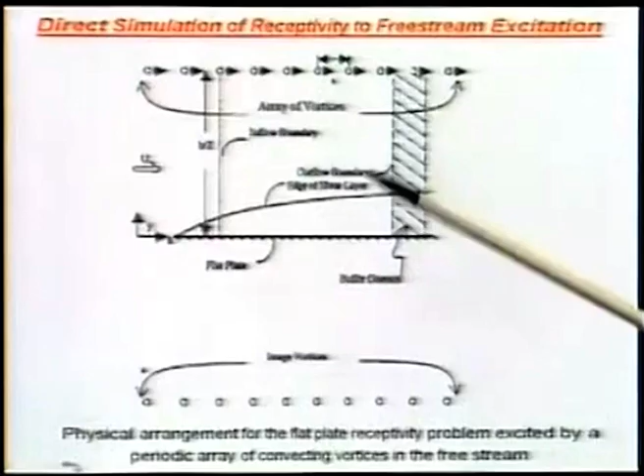The moment that we want to simulate the flow past a flat plate like this with, let's say, very uniform free stream approaching the plate, u infinity, then because this is a no-slip wall and we are putting some kind of singularities out there, these singularities will tend to create some induced velocity. For example, if I talk about a particular vortex here and look at a point like here, what will happen? This will create a velocity normal to that radial vector.

So what happens is that gives rise to a wall normal component and a slip component. The slip component does not create too much of a problem, because it is going to give existing fluid particles some kind of slip velocity. However, the normal component is potentially dangerous, because that implies as if there is some kind of a mass source here, which is not supposed to be there, since we are not explicitly adding any mass source.

So what we can do to obviate that conceptual violation of mass conservation is to immediately talk about an image vortex system. The image vortex system would be nothing but its counterpart vortex, exactly at the same height, exactly at the same location. So at any point I could have a pairwise contribution coming in the opposite direction — one in this direction, the other in this direction — and you can see the normal component will cancel out while the tangential component adds up. This is the whole idea of the image vortex system.

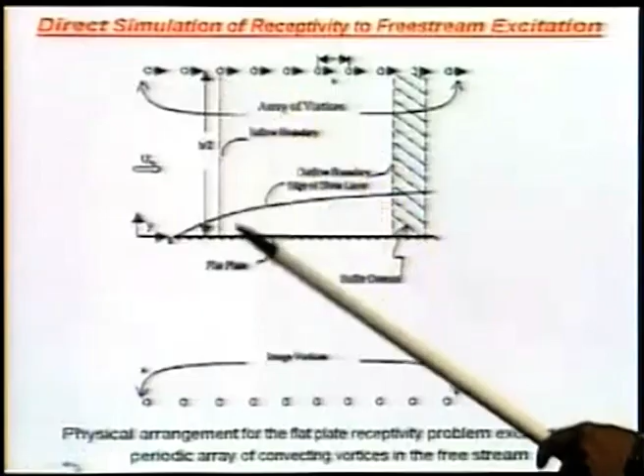Now, the top lid I have not specified. It need not necessarily be there. I could put it somewhere down below.

And the outflow path, you notice that we have a very special layered structure. The hatched area indicates it's a buffer layer.

What does it do? It basically does the following: any disturbance that is created and will move downstream, when it approaches here, that disturbance should cleanly go out. If it cannot go out cleanly, then there will be some kind of a reflection, and that reflection can build up and lead to numerical instability.

So to discern physical instability different from numerical instability, we have to be very cautious in avoiding such spurious reflections. So what we could do is we could forcibly eject it out. That is possible, doable if we can.

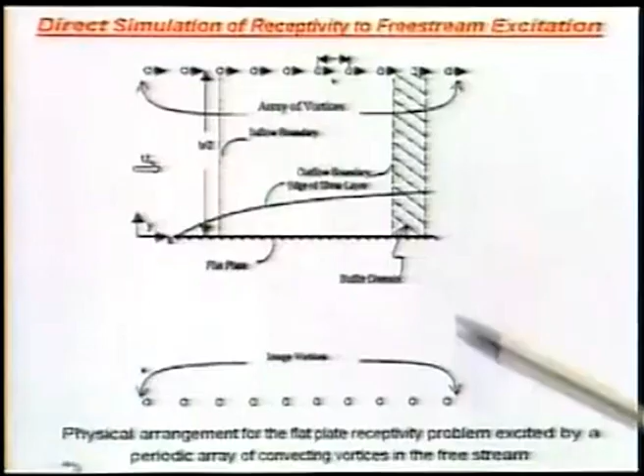The other possibility is, of course, that we create a sort of buffer layer where these oncoming disturbances will be attenuated in such a way that the reflected path will not be there, because we are decaying the disturbance coming in its full strength at the beginning of the buffer domain. Once it's inside the buffer domain, the amplitude will be decayed. So when it comes here, there is nothing to reflect. So this is the concept of introducing a buffer domain.

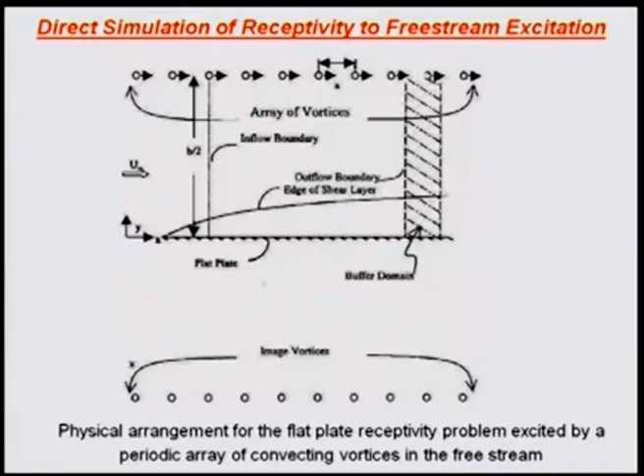Now let's see what we are doing here. Well, what we are doing is the following: we have the plate here. The results that I am going to show you today include a domain like this, as we've seen. This is our buffer layer, and there is a top lid.

We have excluded the leading edge. This is the inflow, and we have these vortices placed here, etc., and we have seen the corresponding image vortex system will be like this.

That's what our image vortex system is going to be. So what is really happening in our computational domain is the presence of this two vortex system will induce a velocity.

As they are so far outside the boundary layer forming over the flat plate, and if we consider these vortices themselves to be some kind of an inviscid irrotational vortex, then the effect of these vortices would be to induce some velocity component. At each and every point, I will have a u infinity imposed and a v infinity imposed.

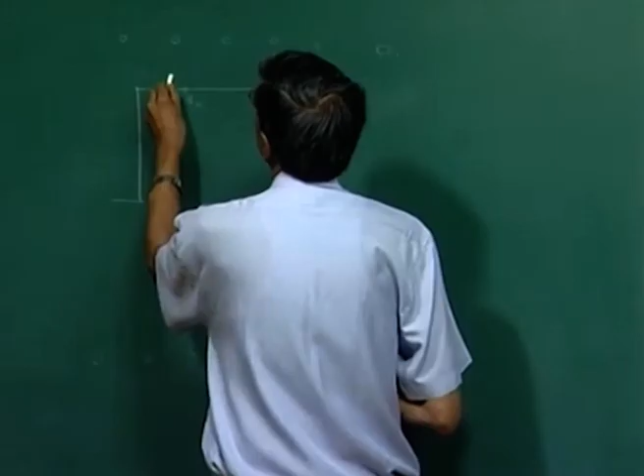Right? And that quantity is figured out here, u infinity. Now, if you...

have followed what is done, the effect of irrotational vortices, you know you can use Biot-Savart law and calculate the effect of an individual vortex. Then the individual vortex effect could be integrated over the whole sequence.

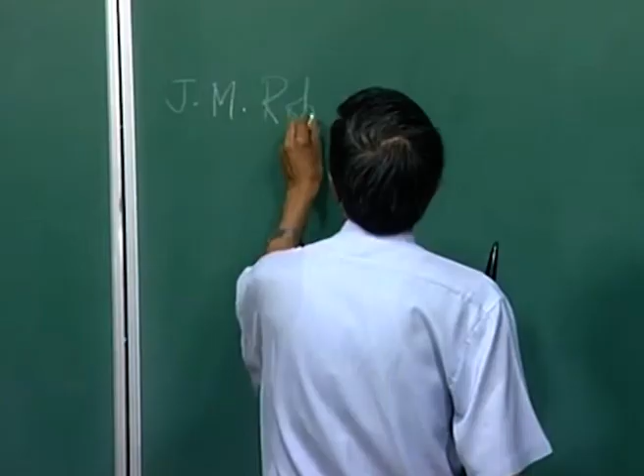So we have an infinite array of vortices along with the image system, and that I could do. You can look at the book by J.M. Robertson. The title of the book is, I think, Hydrodynamics. You can take a look at that book where this kind of inviscid vortex expressions are given.

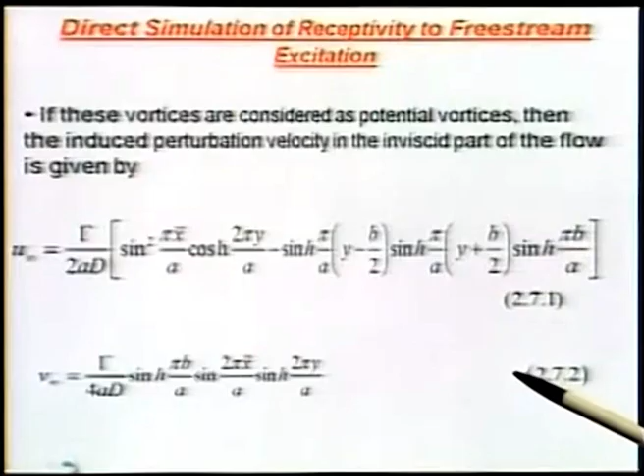So this is basically the u component and v component of velocity as applied at some position x and y. All this sine hyperbolic, cos hyperbolic term comes because we are summing over infinite such arrays. What you notice is the gamma, the individual strength of the vortex, comes into the picture. A is the spacing of the vortex, right?

So this is your A. A is the distance between two successive vortices. B by 2 is the distance that we have talked about. This is the distance, well, not this, sorry. This is the distance of this.

This is that. And now what is happening, you can see these vortices are moving at a constant speed. So what I could do is see that the individual location of the vortex would be given in terms of the vortex's initial location minus c into t, because that's the speed with which it is translating.

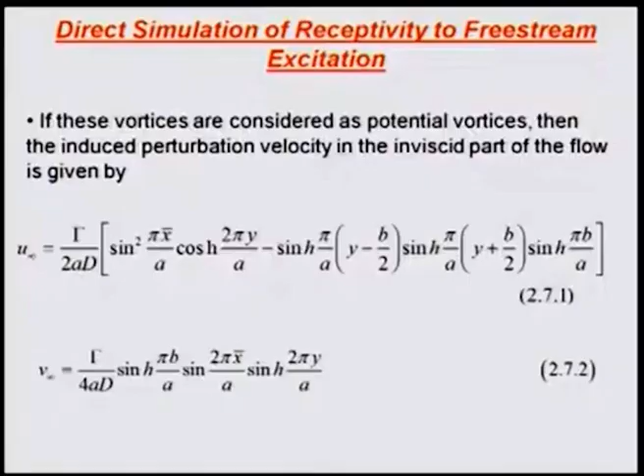So this is your x bar, and those x bars are all out here, you can see. So wherever you position the computational domain end, you know the x and y, plug in those quantities and you should be able to calculate the induced velocities at the box periphery. So that's quite easily done.

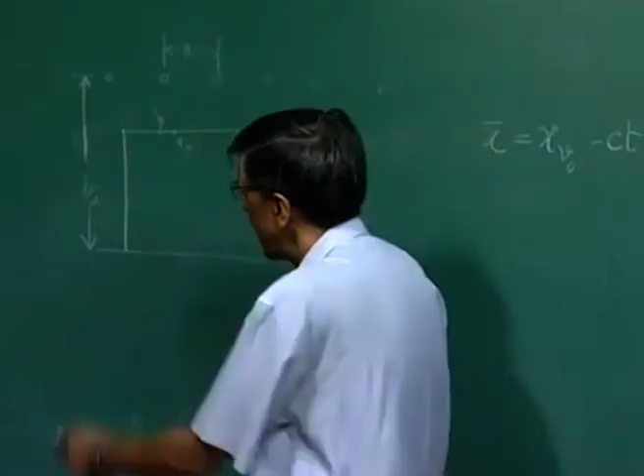So you realize also that there are two things. It's not only that u infinity, v infinity is imposed on the top lid of the computational domain, you also get it happening on the inflow too, right?

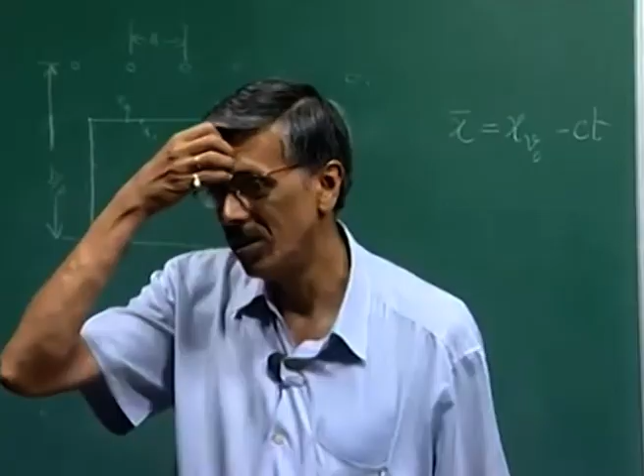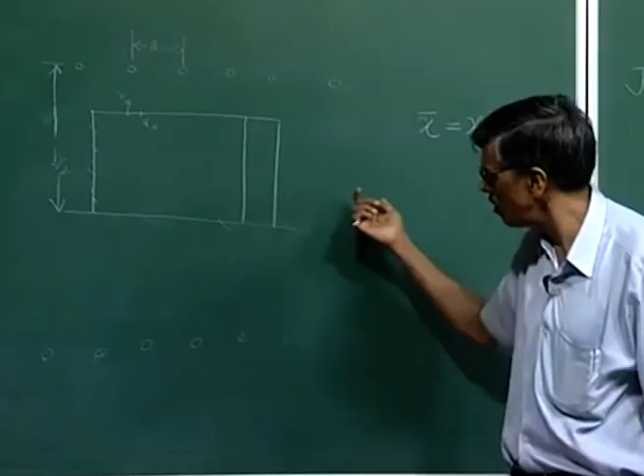So you have to incorporate those two. Here what we do is we don't use that induced component of the velocity, because what we are saying is that this vortex impresses upon some kind of additional disturbances at the inflow and the top lid. As a consequence, some disturbances will be created inside. They will amplify depending on the stability or instability of the problem, and they would like to go out. So I don't want to a priori impose the condition that nothing has happened. We have to give some boundary conditions here which will be independent of what the inviscid flow is doing, because the dynamical system itself would evolve and create additional disturbances.

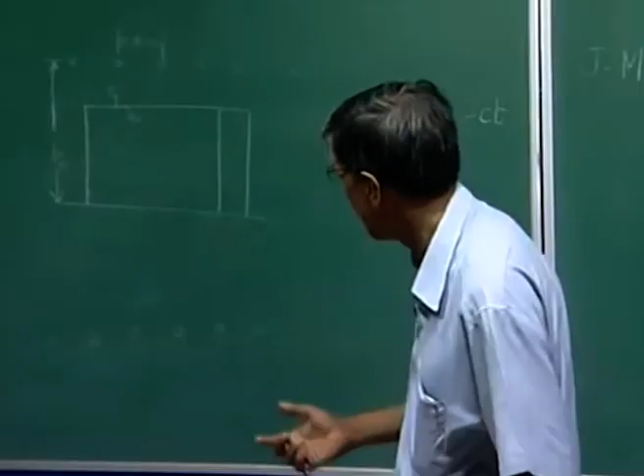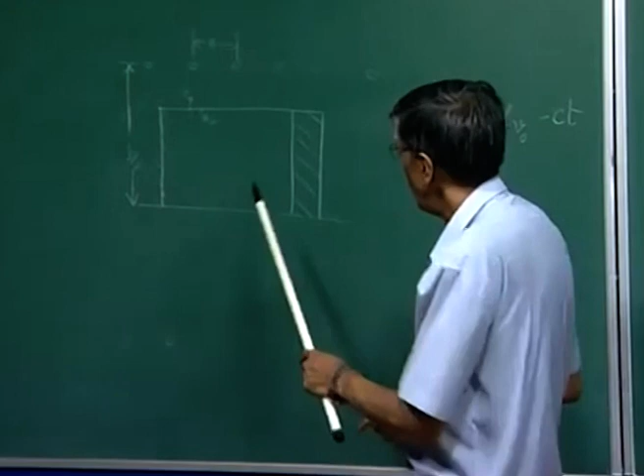So we have to give some interesting boundary condition, and we have already said that in this buffer region, those disturbances plus this, all summed together will be decayed from some finite value to almost negligible value. Also, despite that, whatever may be the remnant should be allowed to pass out cleanly. So we'll talk about those boundary conditions shortly.

Now, as I told you, x bar is some x minus ct, and then you saw that the expression there was u infinity had some d in the denominator. Please note that d will never be equal to 0. So there is no such additional eigenvalues showing up due to inviscid excitation. So this is a proof.

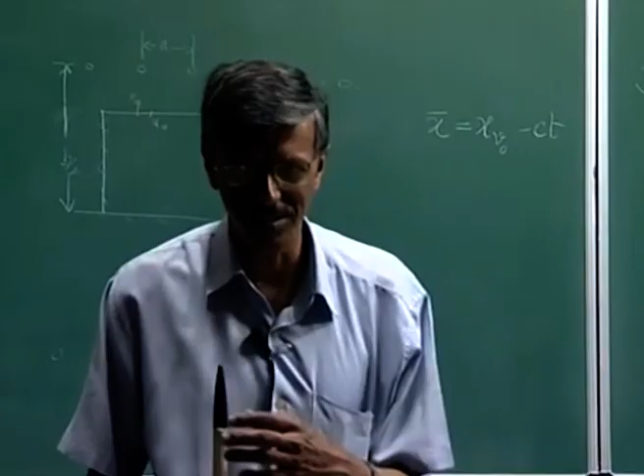It is somewhat very interesting, because a similar approach was taken by von Karman when he started studying the stability of the vortex street behind a circular cylinder. The vortex street gives you 2 rows of vortices, and in the original work of von Karman, he treated them as inviscid vortices and then tried to study the stability of the street. You realize that may not be the correct way of doing things - people have found out that's a wrong way. In fact, here also, when we have these 2 rows of trains of vortices, the denominator term can never become 0, and then you don't get any kind of instability condition due to that.

However, what we have seen is that if we create these vortices which are at a distance a apart and they are migrating at a speed c, I can introduce a time scale. The time scale, which I will call Ts, would be the length scale by the velocity scale. For this convecting vortices, the length scale is a, and velocity scale is the speed of convection.

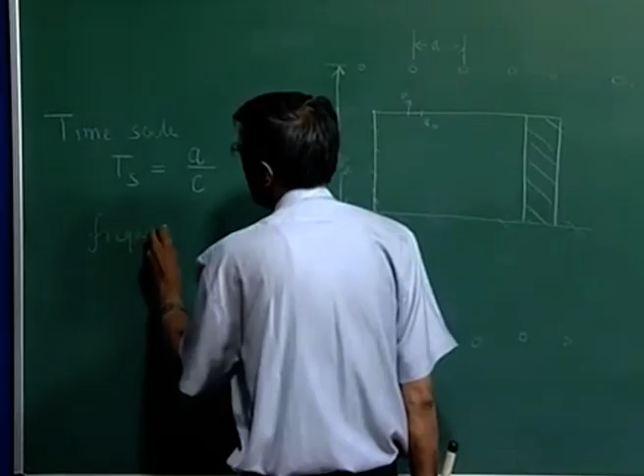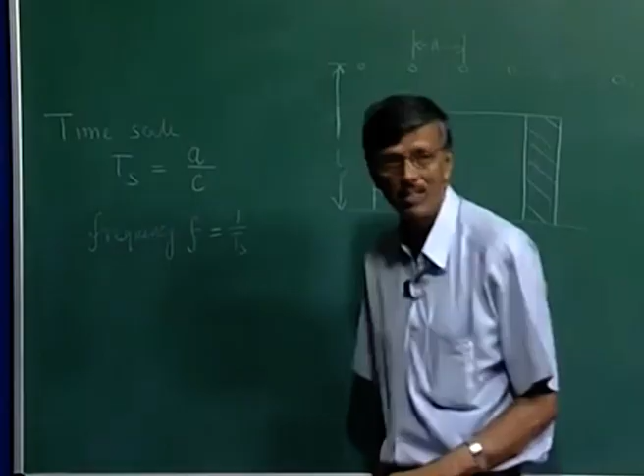So what will be the corresponding frequency imposed? Any point will see so many events happening per second - that is that frequency, which I will call 1 over Ts. This is your physical frequency in hertz or cycle per second.

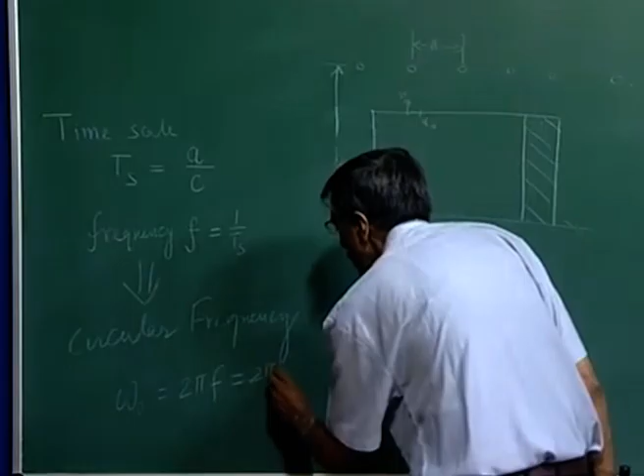What you could do is, from here you could create a circular frequency, which will be nothing but omega naught, 2 pi c by a. You notice that I purposely put omega naught, because this is the fundamental unit. So if I have an infinite sequence of vortices like this, the lowest frequency is created by 2 pi c by a. Then of course you are going to get superharmonics of it.

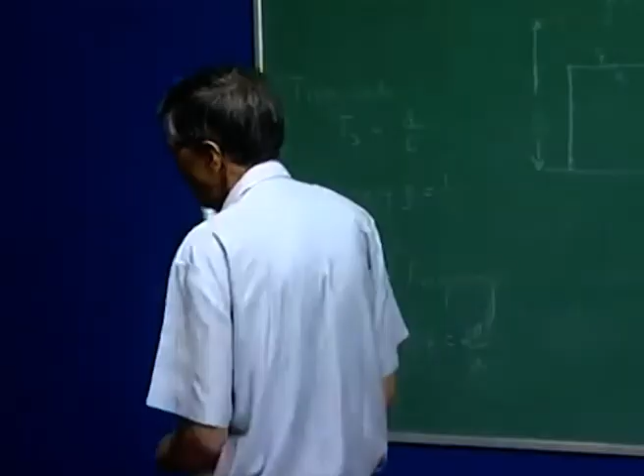So this is the way to visualize the problem - I would write down the disturbance stream function, which will be a function of x, y, and t. The x dependence can be figured out in terms of the phase, i alpha x. Alpha itself could be complex because we are a priori talking about an instability problem. What about the time dependence? Time dependence is going to be happening at omega naught and its various harmonics. So that's what we have done.

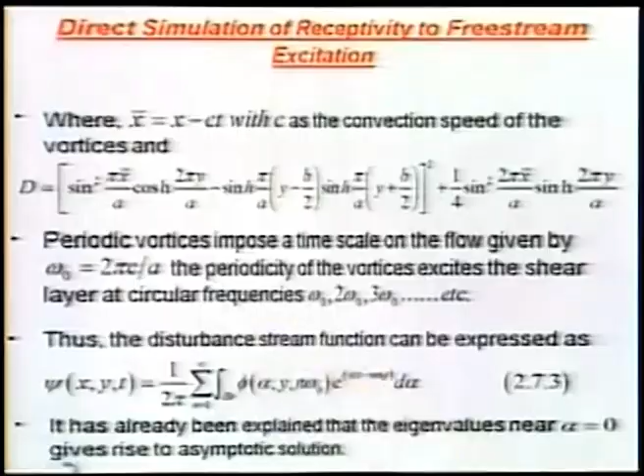We have put in there e to the power minus i n omega naught t, and omega naught we have worked out. Then we should sum over, because it's strictly periodic problem - these vortices are strictly periodic. So it will not be an integral but a sum, and the sum will go from n equal to 1 to infinity. And alpha, of course, will be performed over the Bromwich contour - we all know what a Bromwich contour is. So this is your expression for the disturbance stream function.

Now, we also know that if we are trying to look at the wavy solution which is away from the exciter, then we should be looking for eigenvalues close to the origin. That is what we talked about, the Abel and Tauber theorem. So that's that.

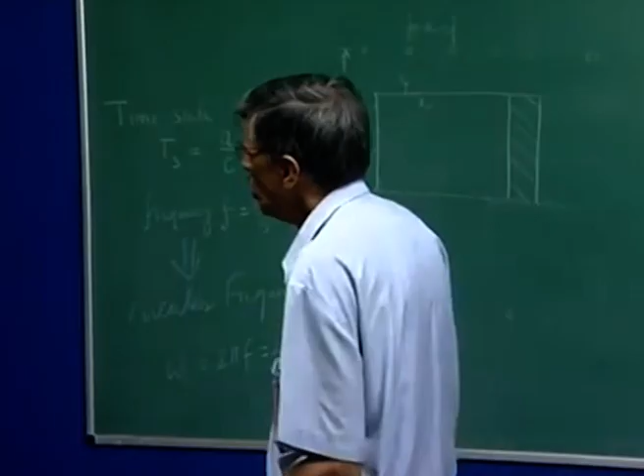Having obtained this expression for disturbance velocity, and having already written down the expression for u infinity and v infinity, now we could conjure a problem. Suppose I place this train of vortices at a non-dimensional unit of 20, and create a top lid slightly below it. My reason is that I do not want to include singularities inside the computational domain, since any discrete inviscid vortices will work as a singularity.

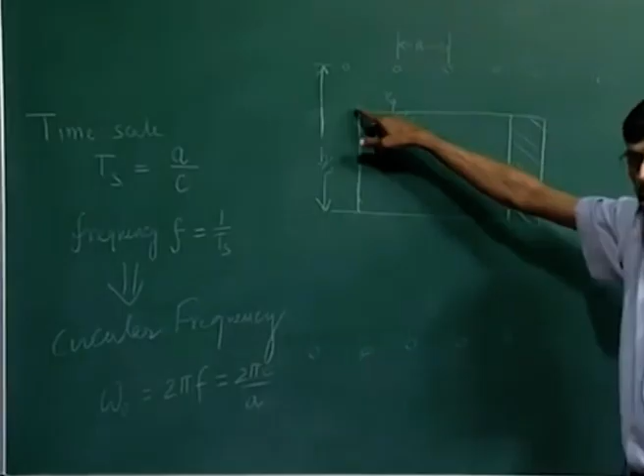So to avoid that, we keep those away, and our top lid is below that train, and then we can calculate u infinity and v infinity. And if we calculate that, this is what we are going to see.

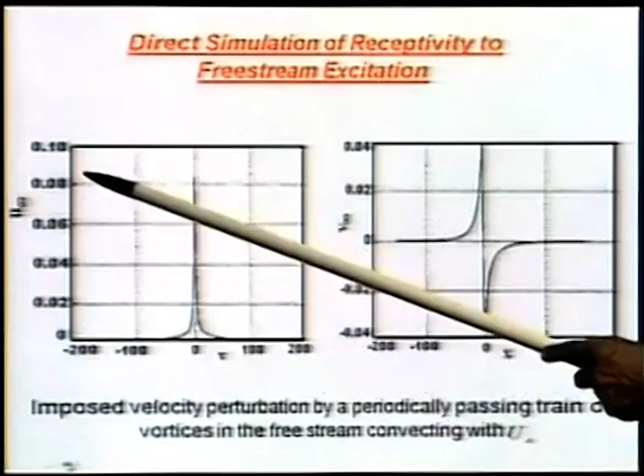Immediately under the vortex, I get the maximum, because that is the shortest distance, so that's where I get this peak. You see, this is roughly about 0.08 for the height we are talking about.

What happens to the v infinity part? V infinity actually flips sign. On the left hand side I would have a positive, on the right hand side it will be negative, because it's rotating - one side going up, the other going down. Please note that u infinity and v infinity are of the same order of magnitude, it's only that here it is flipping sign, going from plus 0.04 to minus 0.04, so this is about 0.08 range. That is exactly like what you are getting.

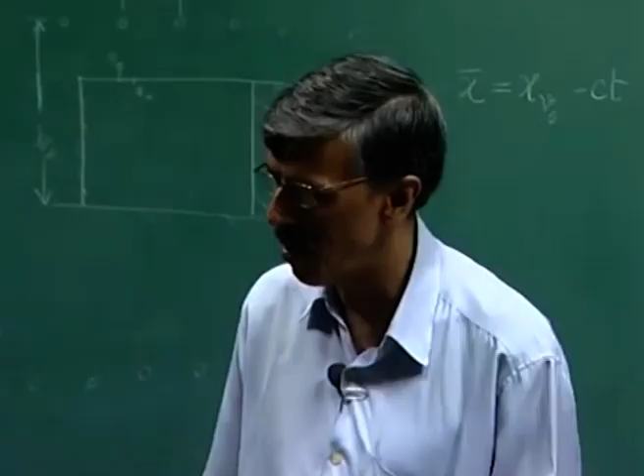However, note the streamwise extent over which the disturbance is felt - this is more localized. U infinity is more localized than v infinity. So what will happen? When you look at the Fourier transform of this u infinity, you will find a wider band. So u infinity and v infinity will excite different kinds of length scales. We should be able to see this if we obtain the Fourier transform, and that's what I am showing you.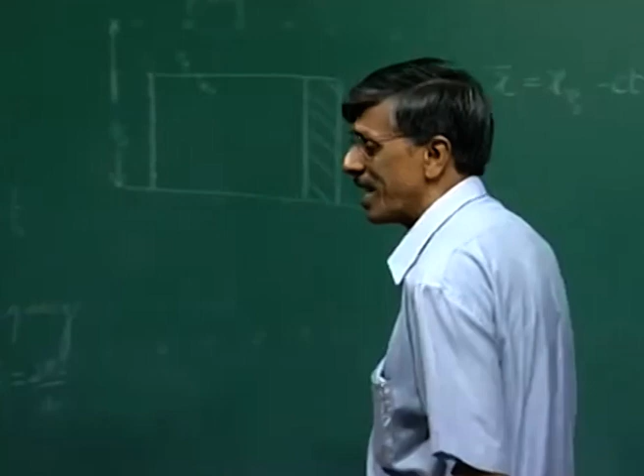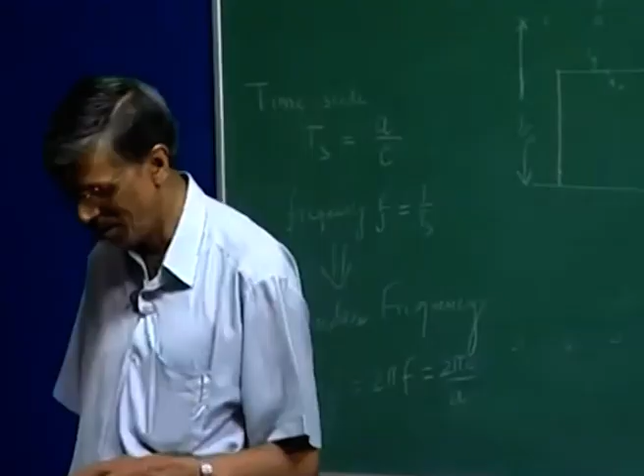It's very interesting that the footprint of u infinity and v infinity means a lot when you look at it in the transform plane. This is one of the reasons we need to be looking at all fronts. If I simply look at the physical plane and say, oh, their relative magnitude is the same, so they have the same effect - in the transform plane, they are not so. You can see it very clearly.

This is corresponding to u, so this is phi infinity prime. If I look at phi infinity prime, the maximum is about 1. And if I look at the bilateral Laplace transform of v infinity, that gives us phi infinity - look at this, about 18. So you can see there is an order of magnitude difference between phi infinity and phi infinity prime.

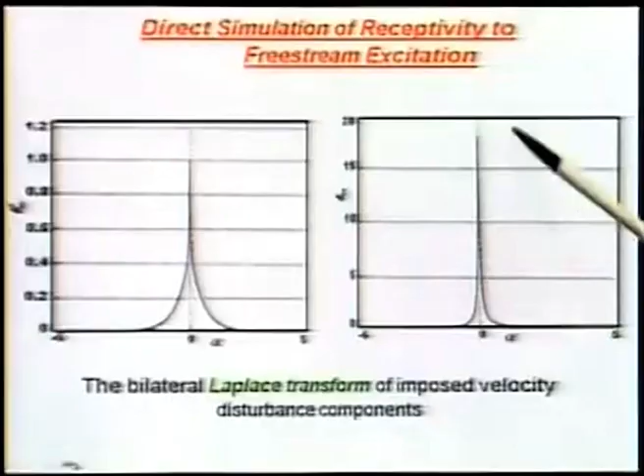We'll use this information later, so please do remember this is what is happening. Why is it happening? You can also make out, because v had a flipping of signs, and it did happen very abruptly, whereas u infinity decayed smoothly. That's why it has a wider band, but it does not peak up as much.

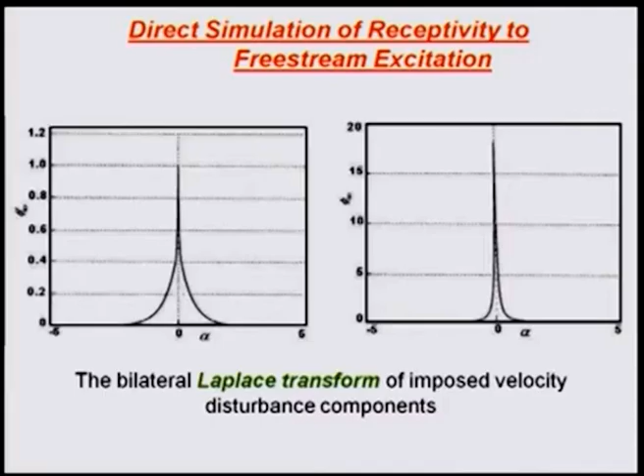Okay, so we have now characterized the input to the system - this is what we are giving it as an input. We have talked about eigenvalues and the receptivity problem for both the wall modes, which decay with height, and the free stream modes, which grow with height. How are these two sets of modes linked together? This is something worth investigating. Let's see what happens - if I look at the Orr-Sommerfeld equation and the problem we just looked at, if we also create some kind of a wall exciter, then we would retain all 4 modes.

What is known to us is that once you are outside the shear layer, these 4 modes have some kind of analytical structure given like this. We have seen that if the real part of alpha and q are positive, then the first and third mode decay with height, while the second and fourth mode grow with height. This is something we should remember.

And if we look at the consequence, we can couple these two fundamental modes into a wall mode, C1 phi 1 plus C3 phi 3, which I will call phi I. Similarly, I could call the other two as the free stream mode, C2 phi 2 plus C4 phi 4, which I call phi II.

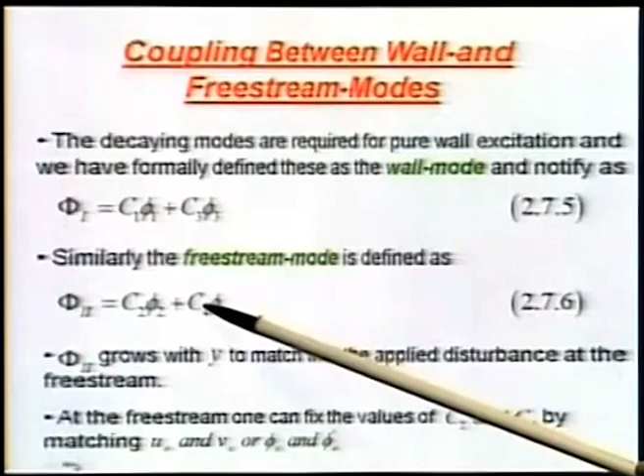So basically, we need this phi II to match the imposed disturbance in the free stream. If I tell you what those disturbances are at the free stream, I have phi infinity and phi infinity prime in terms of u infinity, v infinity we just calculated. So we can immediately obtain C2 and C4 in terms of either u infinity, v infinity, or phi infinity prime. So we should be able to work out.

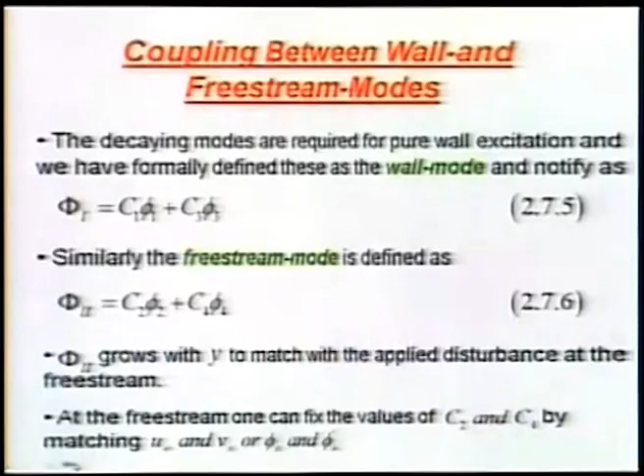What is happening in the free stream about this part? This part is subdominant, it does not exist. That's why independently we can fix C2 and C4 from the free stream condition. This is what we obtain very easily.

Now, having obtained C2 and C4, what we could do is also talk about two distinct classes of subproblems. You see, in instability theory people suffered from some misconception. One of the misconceptions was: suppose I have an inviscid vortex going in the free stream, with no viscous effects, at what speed would it go?

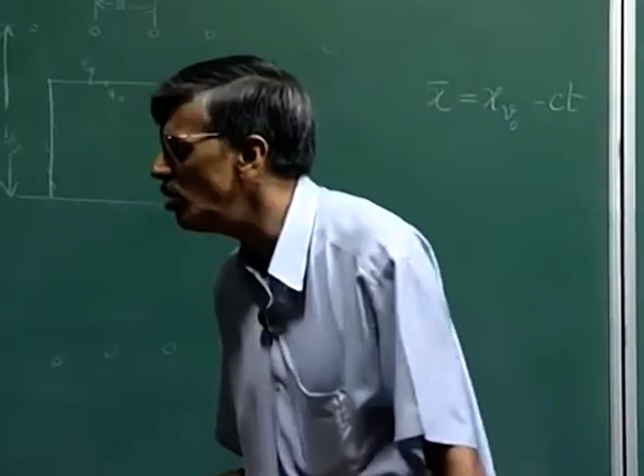Your vorticity transport equation is the substantive derivative of omega equal to 0. That means the omega is going with the local speed. So that is what we call the pure convection problem. So C will be equal to u infinity. If we look at that, when C is equal to U infinity, then what happens?

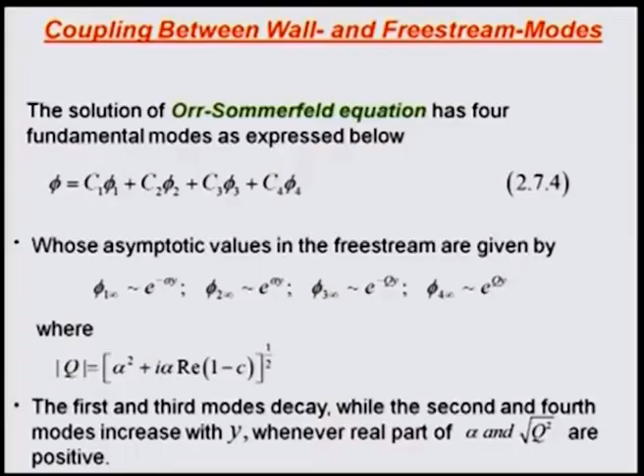You have seen that these modes will coalesce. Why? Because if I look at the expression for Q, if C is equal to U infinity, in a non-dimensional form, C equal to 1, then this part goes to 0. So what you are getting here is Q is square root of alpha square. So what does it mean?

Phi 1 and phi 3 are same, phi 2 and phi 4 are same. Phi 1 is, let us say, minus alpha, phi 3 is also minus alpha, because Q is equal to alpha, and phi 2 equal to phi 4. So there is a case of mode coalescence.

So this mode coalescence has to be kept in purview, and this is what we are talking about here: if we are looking at the pure convection problem, if the vortices move at free stream speed, then phi 1 infinity equal to phi 3 infinity and phi 2 infinity equal to phi 4 infinity. If you are convinced, then we can write down the free stream mode at the free stream.

So I will write it as phi II evaluated at y equal to infinity, and that is nothing but your phi infinity itself, given in terms of this. Now please note that because of the coalescence, we have C4 times capital Y times e to the power alpha capital Y, because this is the condition of coalescence.

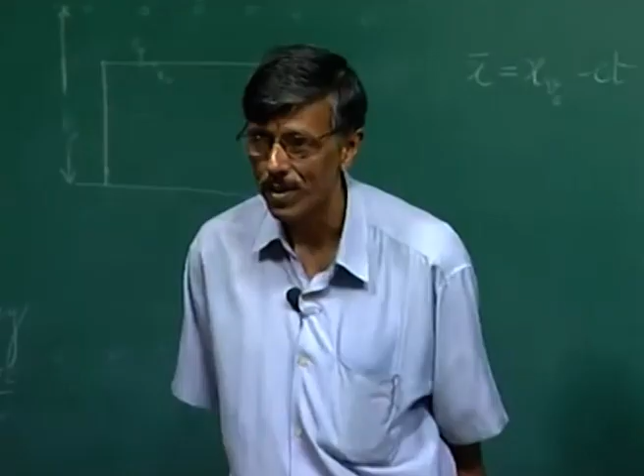And then I can also differentiate it, and I get the corresponding value for phi prime II at y equal to capital Y. So now you see, these are the two equations, 7a and 7b, which will help you in solving C2 and C4 in terms of phi infinity and phi infinity prime. So we know how to get this case solved.

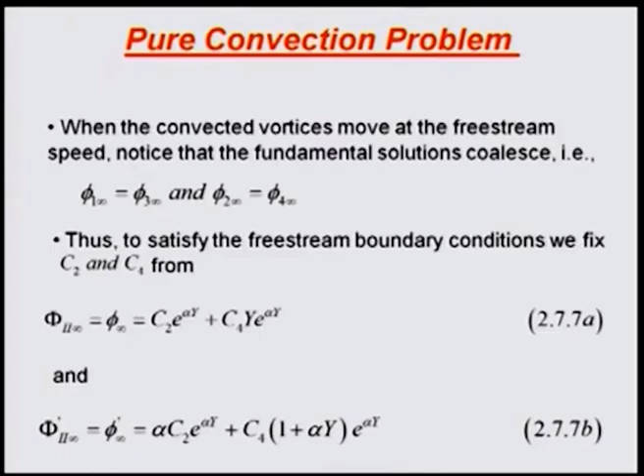Once you have C2 and C4, you can do that. And as I also mentioned to you, when you look at the other mode, the wall mode, they actually go to 0 as y goes to infinity. So this does not interfere in the solution. So we get C2 and C4 like this. Here are your closed form expressions for C2 and C4.

Now suppose we have only the excitation in the free stream, then what happens to the condition at the wall? Condition at the wall should be one of no slip. That means I should have the V component 0, so phi at the wall should be equal to 0, and I should also have the U component 0, so phi prime will be 0.

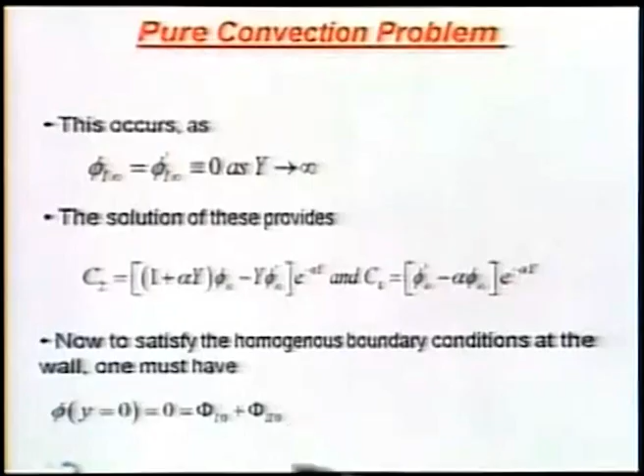So then if phi at the wall is 0, that is equal to phi 1 at 0 plus phi 2 at 0. Now what has happened? As far as this part is concerned, we at least know those multiplicative constants, but for this part, we do not know C1 and C3. So we are trying to clear out a strategy by which we can obtain those C1 and C3.

So this is your condition for phi at the wall. Go ahead and write this as the wall boundary condition for the wall mode. That's what we said as capital phi of I, so that's your boundary condition. That's why I have given additional subscript 0.

And this I am writing on purpose as phi subscript PC. PC stands for pure convection. This is the case we are considering with C equal to U infinity. So that's your pure convection problem.

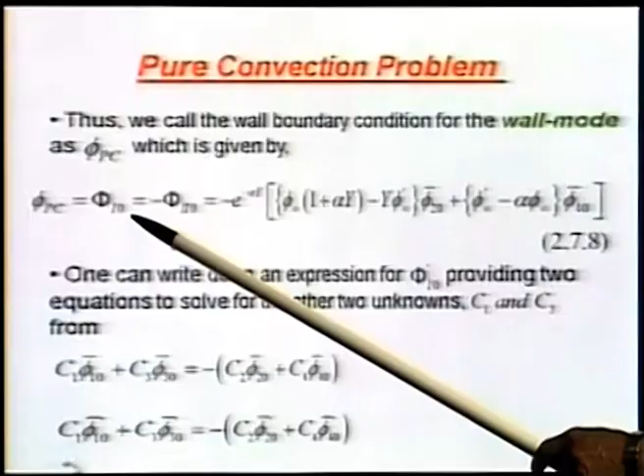Then phi I0 should be equal to minus of this, because sum of this is 0. So since I know this, I can put this. But please note that we do not a priori know what phi 2 0 and phi 4 0 bar are, but supposedly we can integrate something like our Orr-Sommerfeld equation and obtain these fundamental modes. We should be able to get these, right? Now,

What has happened now? We have two sets of equations to obtain for C1 and C3. So this is what we are getting by putting phi at the wall equal to 0. This is coming from the free stream mode evaluated at the wall, and this is this.

So now what you are seeing, this is the v component of velocity and this is the u component of velocity. Whatever I did in the free stream, that in turn gives you this non-zero C1 and C3 from this equation. This is what we are calling the coupling, that I am creating a free stream mode, but that is fixing the coefficient for the wall mode C1 and C3.

So you see, you have not created any wall excitation, but it is happening indirectly, right? Because of the free stream condition, we are going to get non-trivial values of C1 and C3. Once you do that, you get a bit of algebra to be done, and you get those C1 and C3 in terms of this, and the denominator is given in terms of this.

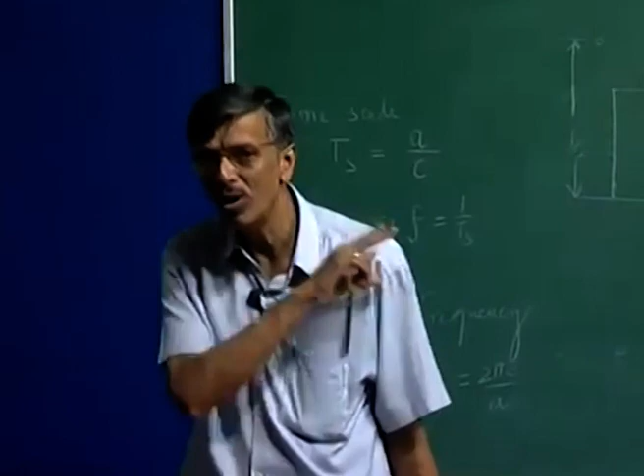And what is this? This is once again your y1, that compound matrix variable evaluated at the wall, right? But what we need to understand is that in this case, phi 1 and phi 3 are the coalescing mode. So this is slightly special, a case where q equal to alpha. So that is what we are going to get.

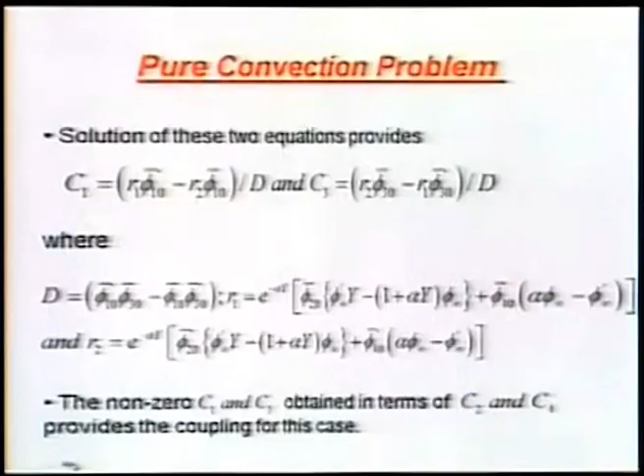And you also notice there are R1 and R2. Those are obtained here, R1 in terms of this and R2 in terms of this. So basically these non-zero values of C1 and C3 can now be obtained in terms of C2 and C4, and that provides the coupling for this case.

So you can now understand what people hoped intuitively, that wherever possible I will excite the system. It will eventually create those eigenvalues. And here is a clue as to the coupling between a free stream excitation and the equivalent wall excitation.

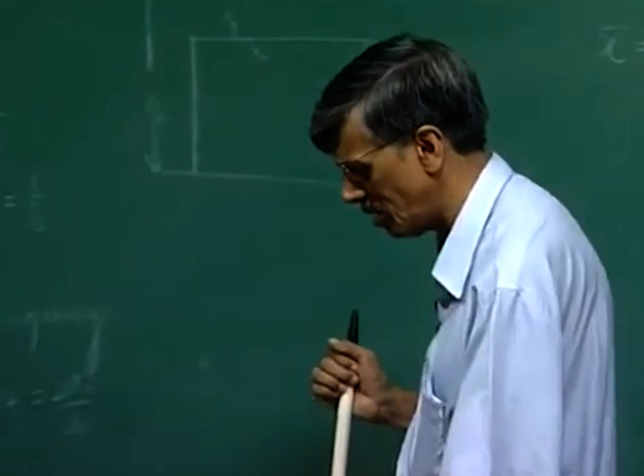Now, I told you there are two subclasses of problem. One case we just discovered or talked about is the pure convection problem. However, there would be a possibility that these vortices will not go to infinity, because this depends on the nature of the vortex. If it's not an inviscid vortex, then in its neighborhood I cannot omit the diffusion term.

So my governing equation is not necessarily this. For an inviscid vortex, we had the governing equation as this, and that gave rise to C equal to U infinity.

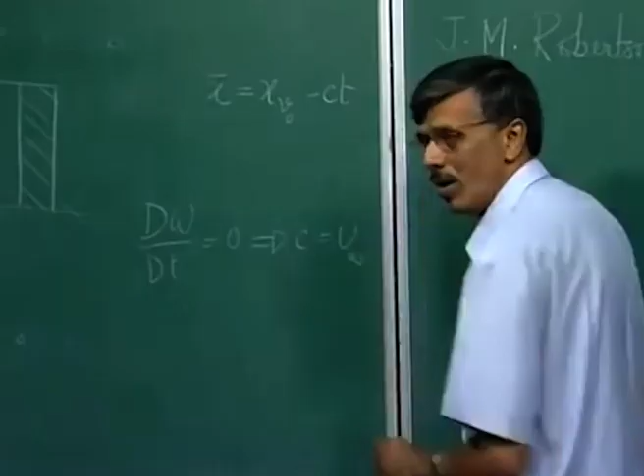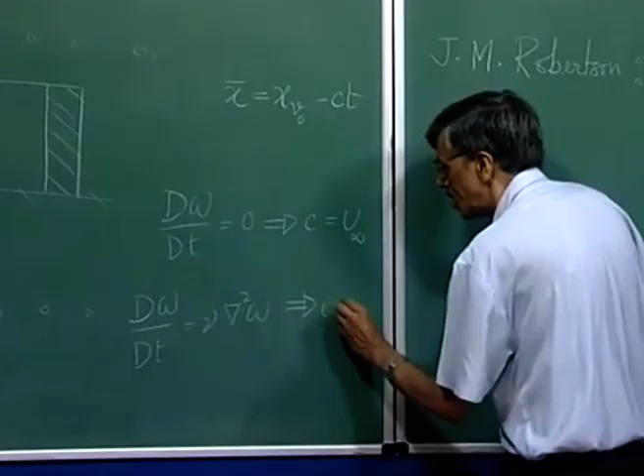But suppose I talk about some viscous vortex, then even in a 2D framework, it would be like d omega dt should be equal to nu times this. And this per se will give you the condition that C will not be equal to U infinity.

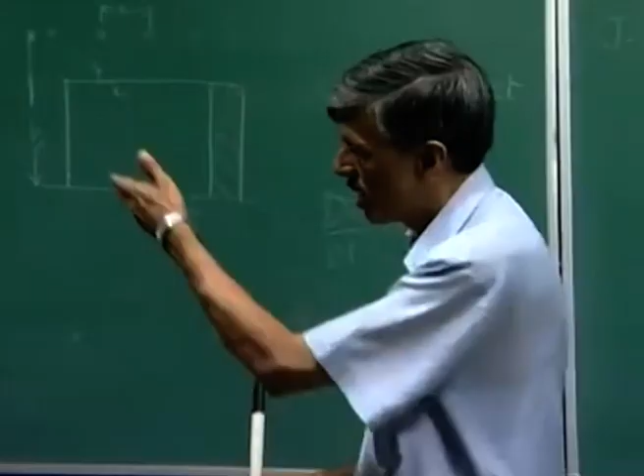For a long time, people in the stability theory fruitlessly argued in favor of this. If you look at all the publications till we came out into the picture, they always used to say, oh, C has to be equal to U infinity and there is no receptivity. They also did not realize that there is a case of mode coalescence, etc. This is something we note.

But more so, when we are looking at viscous vortices, then this is the order. I mean, C is not going to be U infinity. And this mode of events occurring is what we are calling the bypass problem.

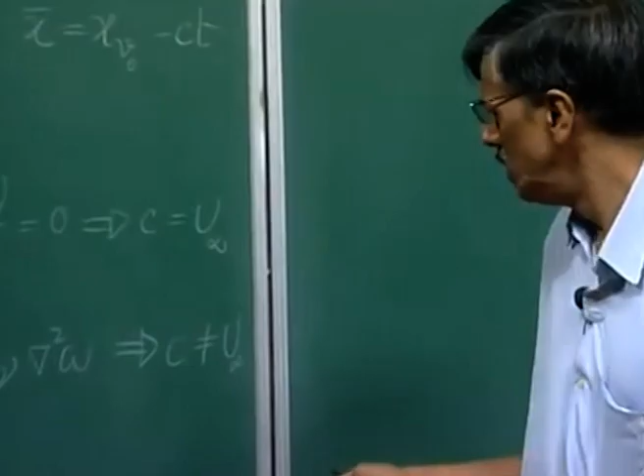Okay, so we are now talking about a case of convecting viscous vortices for which C is not equal to U infinity, and that problem we are calling the bypass problem, implying that the convected vortices will not travel with the free stream speed. One can again calculate the boundary conditions corresponding to the wall mode, even though we are not creating any wall excitation. What we should be doing is calculating phi, which I identify with subscript BP to indicate just a bypass mode.

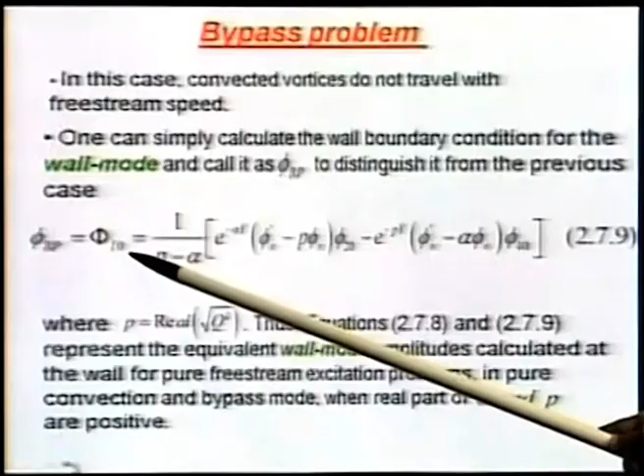That will be capital phi 10. And now what you are getting, you realize that the modes are distinct. There is no mode coalescence. And if the real part of capital Q is P, then this is the way that we are going to get it.

What we are doing here, we are again satisfying the free stream condition to calculate C2 and C4. Having obtained C2 and C4, here they are. This is your C2: e to the power minus alpha y, capital Y, into phi infinity prime minus p phi infinity. And C4 is minus e to the power minus py within parenthesis, phi infinity prime minus alpha phi infinity. So this is your C4, this is your C2.

Now we are evaluating this at the wall. So this is basically phi II at the wall, with a minus sign, and that is equal to the wall mode at the wall. So this is what we are getting.

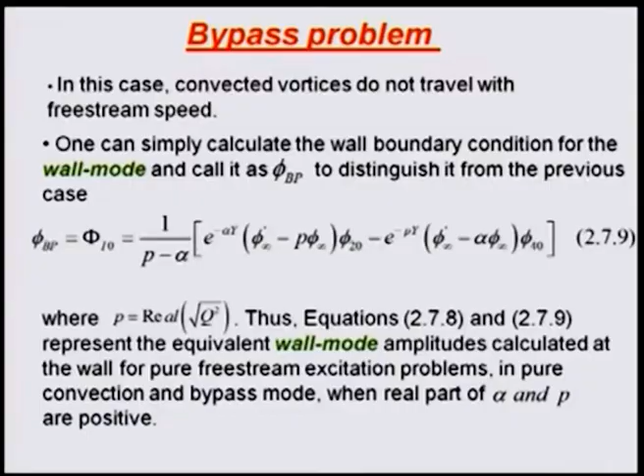This equation that we have talked about created some kind of equivalent wall mode amplitude in pure convection and bypass mode when the real part of alpha and p are positive. If they are not, we can change the condition appropriately and work out an alternative expression. So that's not a big deal.

Now, what has happened here? We have calculated the effect of inviscid vortices at the wall. That's what we call phi PC. Now, we have just calculated, if there are viscous vortices going, what is the equivalent excitation at the wall, which we call phi BP. We can take the ratio, and it looks like this.

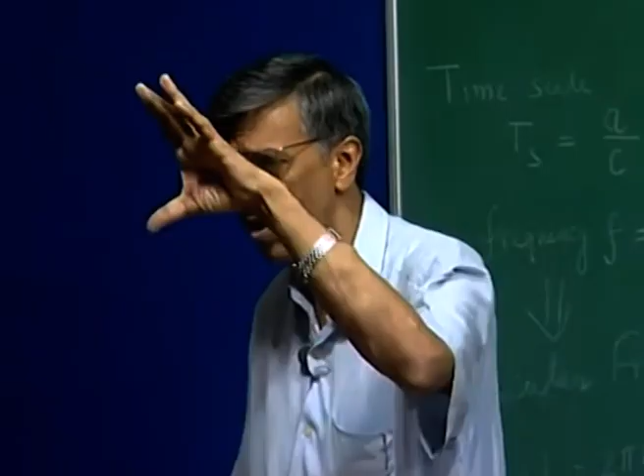Now, what have we used? We have used this condition. Do you recall I showed you how phi infinity was of the order 1, whereas this was of the order 18 to 20, whereas phi infinity prime was order 1? So we have eliminated that, and we have simplified this. So we can actually simplify it, and we get this condition.

What happens is you need to basically know what your phi 20 at the wall is going to be for the pure convection case and the bypass case, that this ratio plus this. Now what happens here, of course, in the general case...

This is a small quantity, right? Phi infinity prime by phi infinity. So this part is negligible. So 1 plus alpha y, that's what we are getting.

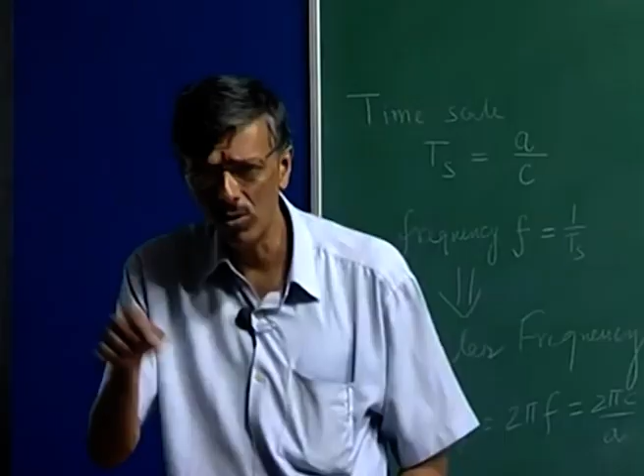Y is usually large, we are taking it at a very higher up height. Alpha is rather small because we are looking at eigenvalues close to the origin. So this is not really a very strong thing. What really determines this ratio is the ratio of the two.

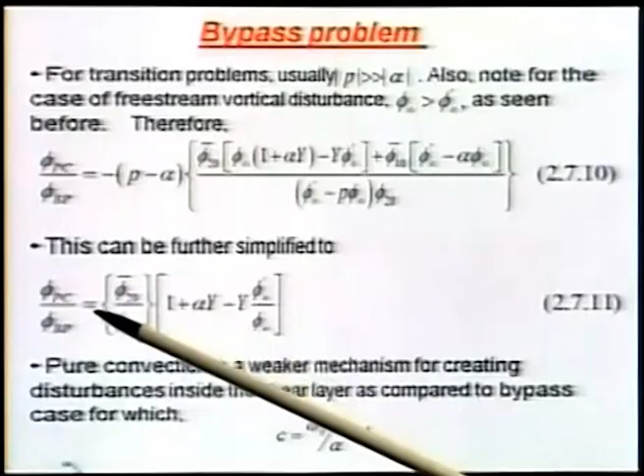And what we find eventually is that this quantity is going to be a small quantity. That means this equivalent wall excitation for the pure convection case is a much weaker case than the bypass mode. Well, we can see this, but we don't have to be convinced immediately because we don't have a closed form estimate for this.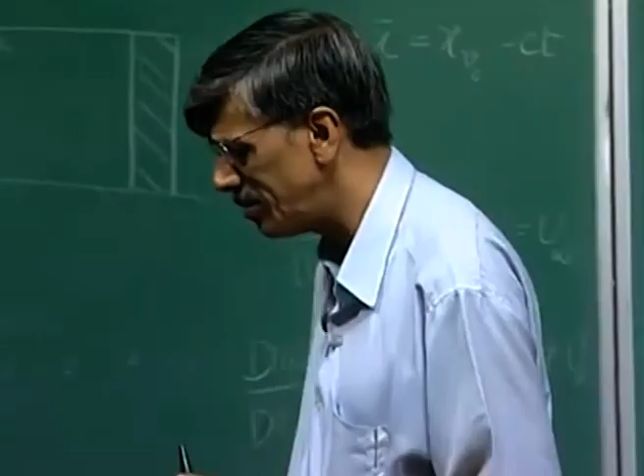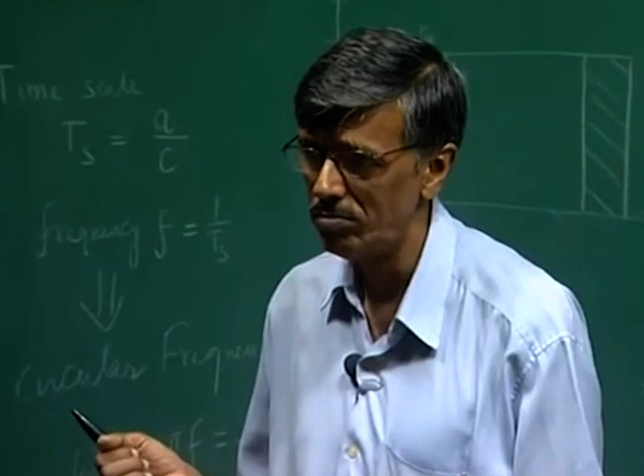Phi 2 0 bar and phi 2 0, but we can solve the Navier-Stokes equation and we can see what happens. However, we are creating the wall excitation by the free stream convecting vortices. But how would those wall disturbances go? This is something that we must distinguish, and this is where I think people have missed out the picture completely.

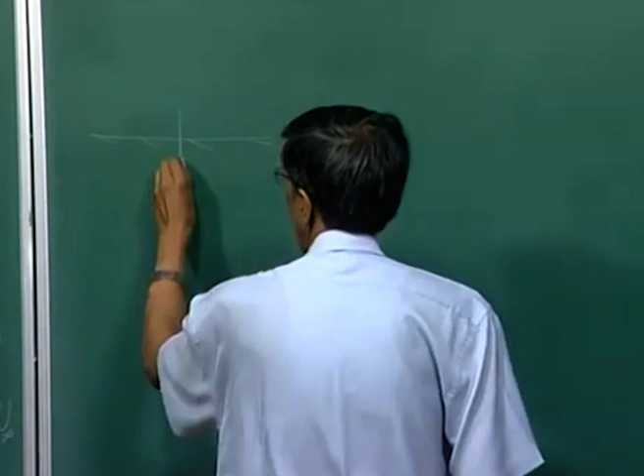And this is what we pointed out: a free stream excitation is equivalent to creating an equivalent wall excitation, but what should we track? Remember, in the earlier case when we were talking about the Schubauer-Skramstad experiment, we created a wall excitation here corresponding to a fixed frequency, right?

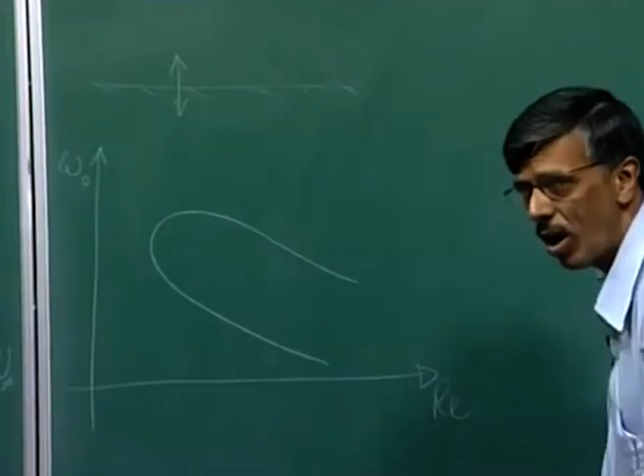And then what we did was plot the neutral curve in RE omega naught case for the signal problem, and we found the neutral curve like this, and the constant frequency disturbances were tracked by rays going like this. So this was your capital F equal to constant.

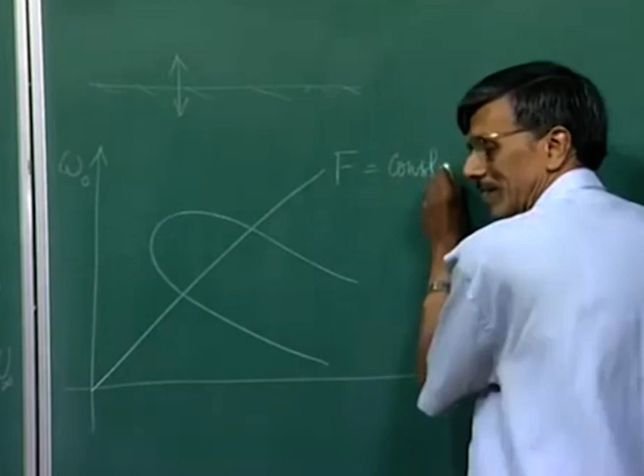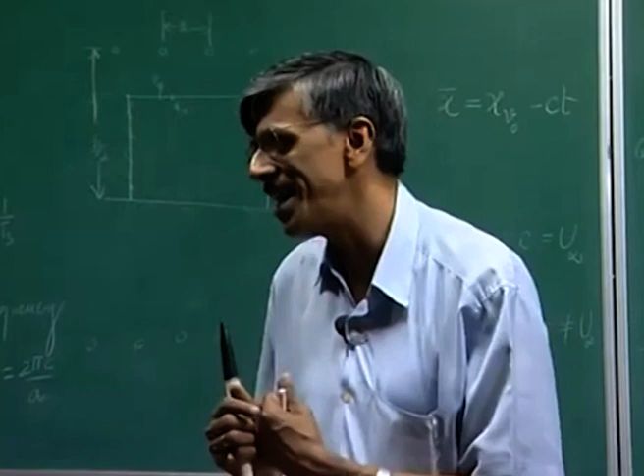That's what we studied, right? We've seen that. But now what is happening? Here the disturbance propagation is tricky because it is not happening at a fixed frequency. You have already seen that the moment I prescribed C and A naught, I created a sort of omega naught and its superharmonic. So this is not a monochromatic disturbance. What is invariant in this problem? It is the speed at which the disturbance is propagating in this free stream.

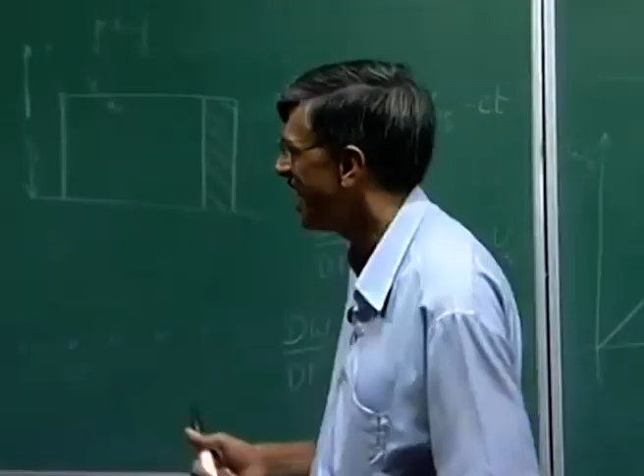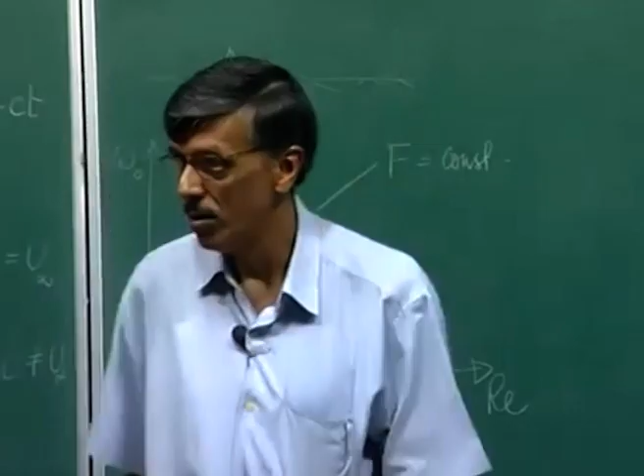It's unstable inside, stable outside, and these are various C equal to constant lines. For example, this line corresponds to C equal to 0.3169. These are all non-dimensionalized with respect to u infinity. So if a disturbance, if those convecting vortices go at this speed 0.3169, and if I try to trace them, I should be tracing them along this line. And this is significantly different than what we did for pure monochromatic wall excitation.

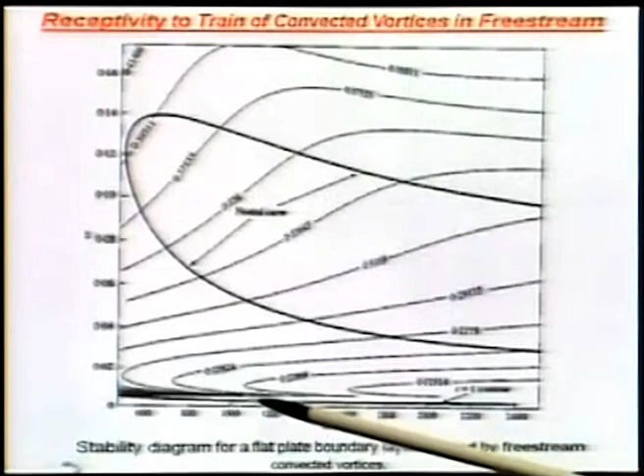Here I would probably be looking at this. And what you notice is basically that these lines are very square. For example, C equal to 1, that means when C is going at the free stream speed, that would correspond to C equal to 1 line. That is right there, and that remains always outside.

So that's what people have talked about, that there is no receptivity to pure convection problem. So if you make some inviscid vortex go in the free stream at the free stream speed, the disturbances those are going to be created, they are going to be very, very stable, because you see this is so far away from the neutral curve. So this decay rate is rather large.

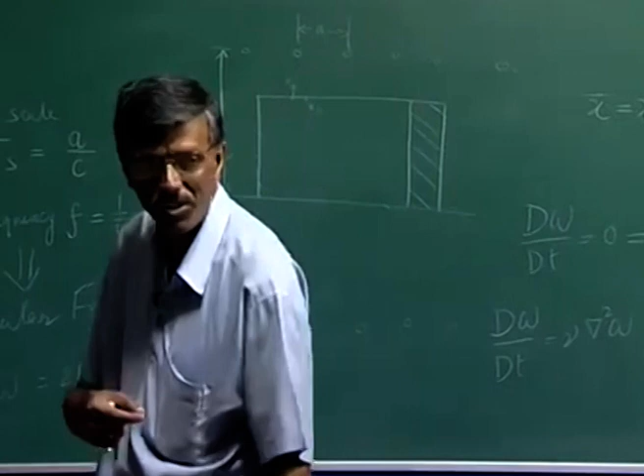So you are not going to create that. And this is what people have noted theoretically. But the point remains that experimentally it does not happen so. I mean, free stream turbulence etc., they all do have finite visible effect. So what are we missing? We are missing what we discussed today, that those vortices themselves did not necessarily be inviscid vortices, and then C will not be equal to u infinity, and different values of C will have different instability patterns.

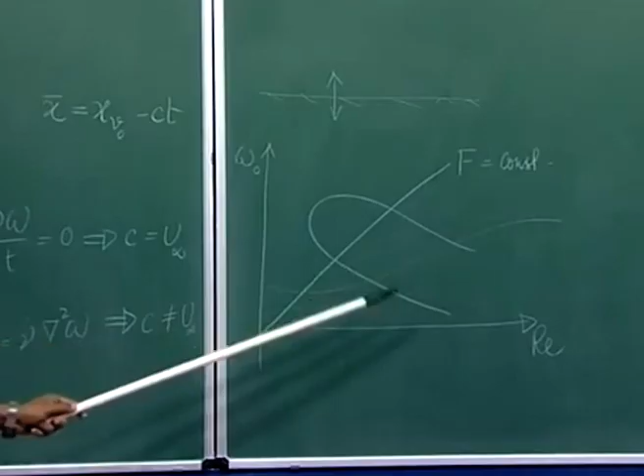See, for example, this case 0.3169. It enters the neutral loop here, becomes unstable here, and then remains unstable for a long stretch. This is significantly different from this monochromatic wall excitation. There it just enters here, exits here. And now you see it enters here, exits there. But there could be even other cases where it would be actually going in and going in there.

What more? If you recall what we have studied about the alpha I contours, this is alpha I equal to 0. Inside, alpha is negative. How does it increase? We have the highest value of the alpha I contour as a line like this. So what happens is the disturbances that convect with speed other than u infinity, they go inside, stay over a longer region, remaining unstable, and they also visit the unstable path and stay there for a longer time.

So because of the prevalent mindset in the late 90s, we call this bypass transition. Why is it bypass transition? It is not really bypass, because you are still creating waves. But what you are creating is basically an assembly of waves. You have excitation as omega naught, 2 omega naught, 3 omega naught. So in the end what you get? You get a kind of wave packets consisting of TS waves.

We should not have called it bypass, but if we would not have called this a bypass mode, how would we characterize it? We said this is not the usual Schubauer-Skramstad type of TS wave, but it's a different kind of TS wave, and we call this a bypass mode of transition. But essentially these are wave packets created like this. So this is what we must understand.

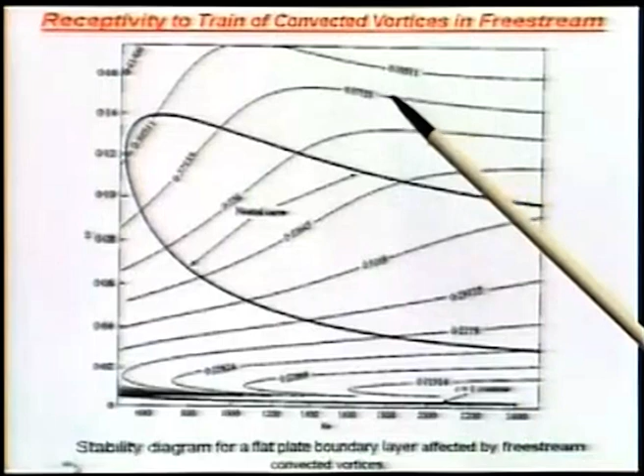And you also notice that there is a bit of selectivity of the value of C. We see that this curve is something close to 0.26. So anything below 0.26 is stable, anything above 0.4 is also stable. So there is a band, a band of convecting speed in which this remains unstable.

In fact, some such experiment was done by Dr. Jim Kendall at Jet Propulsion Lab. So when I showed him this result in a conference in Washington, he actually narrated to me a couple of his papers where he's seen this thing but could never explain. And this figure very clearly says why he saw what he saw.

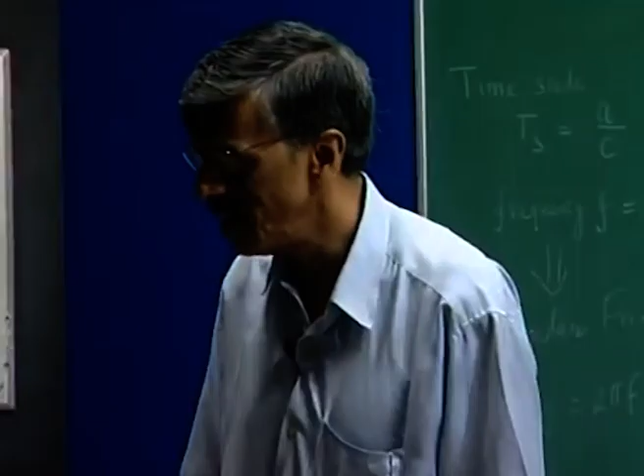I think I'll stop here. In the next class, I'll briefly explain what Kendall's experiment was, what he observed, how does it all gel with this. And you'll see a very interesting story emerging there.